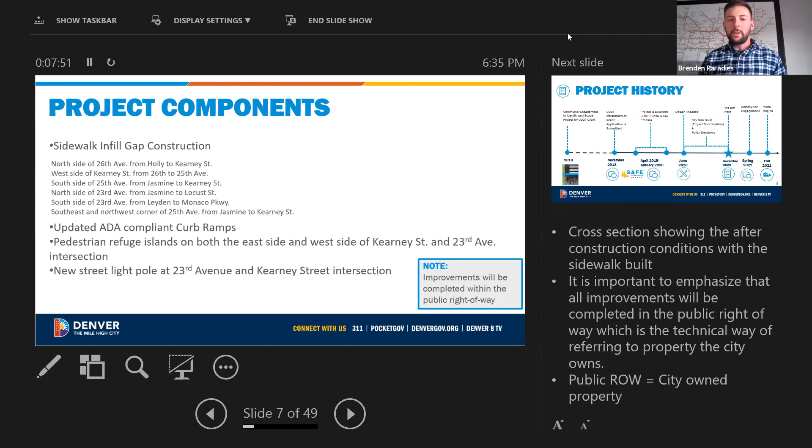The great thing about that is it's really a concrete median in the center of the street with the space in between that really helps pedestrians cross. So we're very excited to be able to include that in the project. We'll also be putting in a new streetlight pole at that same intersection to bring some visibility there. So it's really a great asset in addition to the project.

A little bit about the history of it. Back in 2017, 2018, a lot of community engagement took place with the city. I know a lot of different residents here were very engaged with that to really help identify the scope of this project in order to apply for a Colorado Department of Transportation grant. So this entire project is funded by the Colorado Department of Transportation, so we're pretty strict on the scope of what we can do with this project, and that's what we're going to be able to do.

We submitted the grant application November of 2018. We were lucky, we were awarded that in April of 2019. And throughout the rest of 2019, we really worked with CDOT on the IGA process to secure those funds so we could start doing the design with our consultant in June of last year. A lot of different coordination took place. We were able to keep going forward with Xcel and different utility companies to keep the design moving forward, and got to the point now where we can really talk about the project in confidence about what we're going to be able to build and what it will look like.

The projected timeline for when we are anticipating construction starting for this project will be later this year. We're shooting for October, but we still have to post bid for the construction of the project. We're not quite there yet, but we are getting close. So we're spending a lot of time over the summer getting those ducks in a row with our construction contractors so we can get underway later this year.

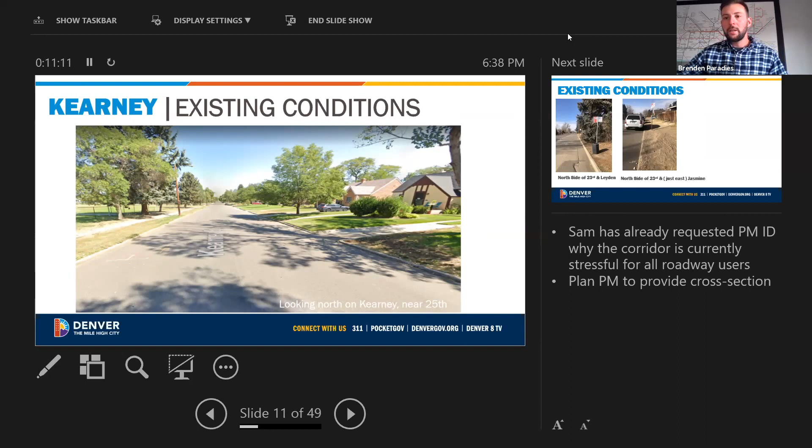And I'm sure, as you all are very familiar since you live in this area, this is just showing a picture of Kearney Street, one area where we will be installing sidewalks right up next to the property of the school. This is in between 25th and 26th. So we'll be putting in sidewalk there on the west side, which I'm sure a lot of you are familiar with, already has more or less kind of that goat path where people have been walking anyway. So it'll be really nice to get a sidewalk in there and really make that a permanent space.

Similarly, we're here on 23rd, where we'll also be putting sidewalks. So it's a really nice facility that we'll be able to do here on 23rd to get folks all the way down to Monaco Parkway without having to walk in the street. So very excited to be able to do that.

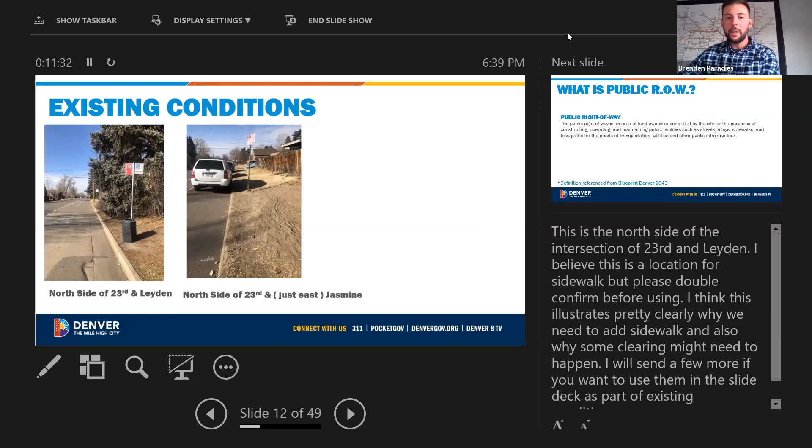And again, too, just another defining moment about what is right of way. Everything that we're going to be building as part of this project is what is called the public right of way. Basically, just a fancy way of saying a dedicated easement of which the city owns. So we just wanted to throw that in here. All of what we're building is not on private property. While it might be adjacent to private property, it's all in public right of way.

So just wanted to throw that definition up here and be clear about that as we continue forward. This image here, we pulled one—this is more or less up in the Highlands area, Tennyson, but gives you a good overview. You can see the areas in orange, which is consistent with what right of way is, or where it is adjacent to where property lines would be for private residents.

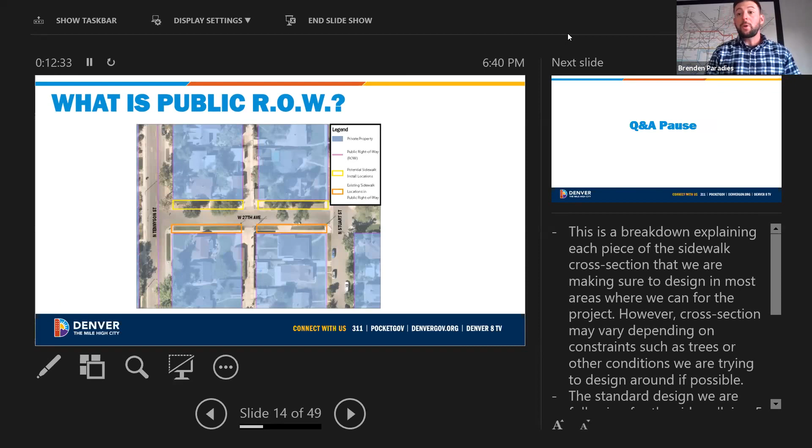So just wanted to throw that out there before we really dive into the details of the design for the project. But I wanted to have our first Q&A break, and I apologize—somehow with my presentation view, I can't see the chat box. So hopefully someone can raise those questions to our team and we can answer them. Ken, if you're able to help with that would be great, or Nora, that would be appreciated.

There's one question in the chat from John: Was signalization or a four-way stop considered at Kearney and 23rd? It's a very busy intersection. The proposed changes at the intersection seem insufficient. So the question is around increased signalization or consideration of a four-way stop, such as the ones on 26th.

Yeah, Michael, do you want to take that? I know that was something we did look into—it's something we discussed pretty early on with the city team. At the time, taking the characteristics of the neighborhood, the thought of signalizing that, and the spacing relative to Holly as well as Monaco, it was dismissed pretty early. So what you see is just a two-way stop, and again, that was really to try to keep momentum going along 23rd. So it was discussed, but it was dismissed.

As part of when the ped refuge islands are there, there'll be a lot of pedestrian yield signs. We'll also have those white hash marks or crosswalk markings there too, to really indicate, hey, there's a crossing here. So we're hoping that will help bring visibility there too.

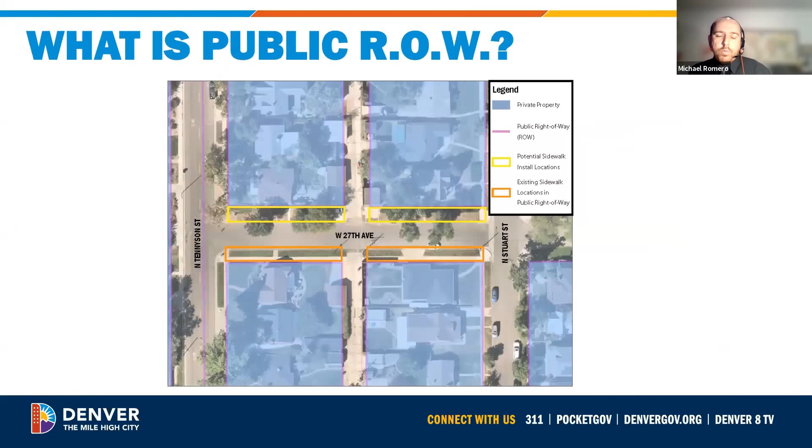That block specifically on the south side, between Krameria and Leyden along 23rd, is the last block that's part of the CDOT funded portion of this project. An application gets processed through the Safe Routes to School program, and we can't really deviate much from what blocks were and were not applied for at that time. So I think that's possibly why it was missed at the time of the application.

Got it. Any other questions before we move on? Nothing else in the chat box, Brendan. Okay, awesome, we'll keep going.

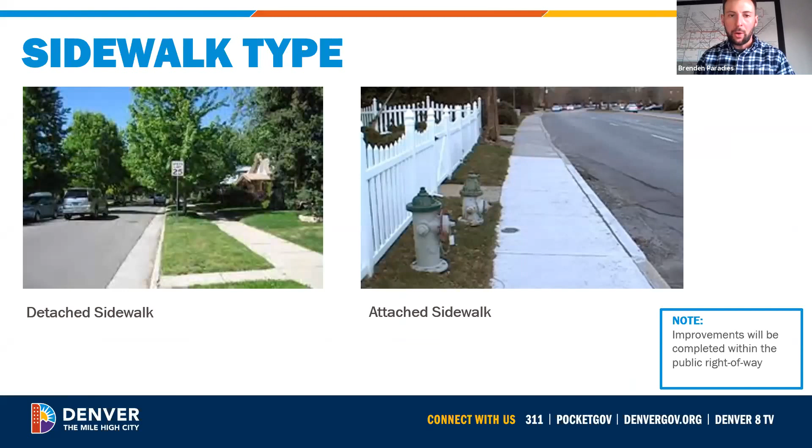This section here, we're really going to get into the weeds talking about block by block, and I was going to let Michael talk through that. But of course, we're all here to keep answering questions as we go. We'll have another Q&A pause after this next section too. So Michael, I'll let you start here.

Sure, no problem. Again, my name is Michael Romero. I work for Stanley Consultants, we are the consultant team. I'm the project manager for the consultant team, helping out the city with this project. We did a lot of the work pulling these plans together, so hopefully I'm able to answer any questions that come up.

I wanted to start out with some general terms. The first thing you guys will see out there in terms of construction are aggregate bags. They're kind of like rock gravel bags that are placed in the curb and gutter. This helps keep down any erosion or anything like that kicked up during construction from getting into the sewer system. It's just a way of keeping the construction area clean. So once you see those go out, you know construction is going to be starting soon after that.

Something else you'll see is that on both sides of the sidewalk, generally we have to grade back into the ground to make things smooth, so the sidewalk's not floating in the air or dug down into the ground. That way it's all one smooth transition. So in the areas along the sidewalks, you'll see there's going to be some disturbed area, and that's going to get sodded over at the completion of construction.

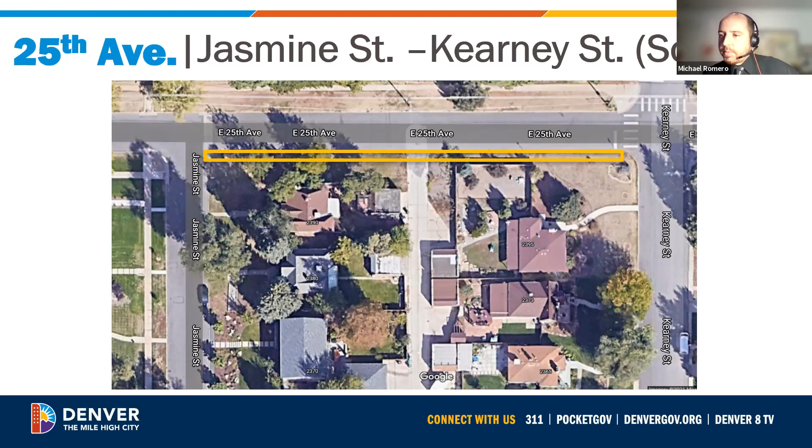This one's going to be a little bit more interesting. The property that's on the east of those 2 is a detached sidewalk, about 5 feet, I think 5.5 feet. We're going to redo some of the alley pan in between the 2. Then on the west side, west of that alley, we actually push the sidewalk out even further.

We do this for a couple reasons. One, it aligns with the sidewalk west of Jasmine. Two, we're really trying to salvage those 2 trees. They're in great condition, so we'd love to keep them. In doing so, there's a little bit of a grade difference here.

On the sidewalk, for a large portion of this half block, you're going to see like a 6-inch curb head. We're trying to avoid walls, so if we put in this 6-inch curb head, we can keep everything looking good, not intruding into anyone's property. This will entirely be within the Denver right of way. So that's really the only thing unique about that block.

Now we jump down to 23rd. We're starting at Jasmine, heading east to Kearney. This is going to be a detached sidewalk as well. We're only doing work on the north side here.

Again, there's going to be another little curb head on the back of the sidewalk, specifically for the property on the west. We are going to clean up that alley pan, and I think there's going to be a little bit of driveway work too that just makes sure everything ties in really nice.

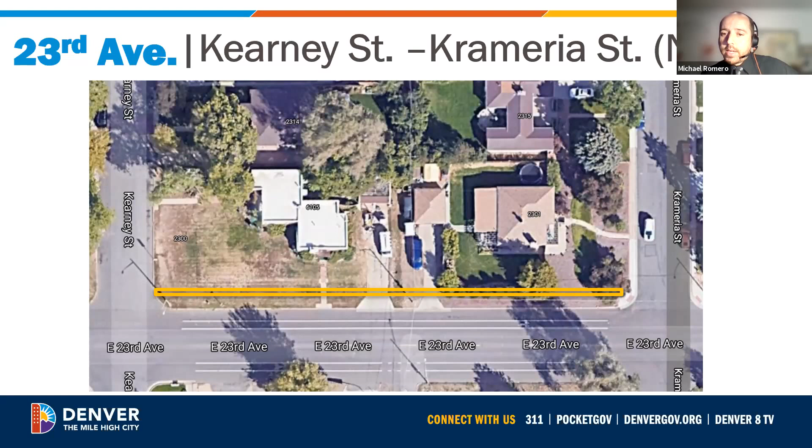If you can go back one more - you can see here too where it goes from detached to attached sidewalk, kind of mid-block there. And again, the decision was made to do it there to really keep intact as much as we can. And again, it's going to continually be attached from here to the east. So it just seemed like an appropriate place to make that decision.

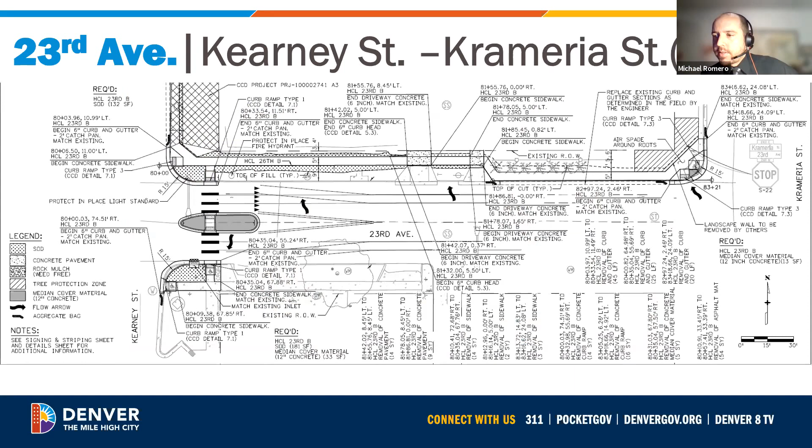23rd between Krameria and Leyden. This is the last block of the CDOT funded portion of the project. Here, we're going to have an attached sidewalk for the whole block. All the trees are going to be saved. There will be some pruning by Denver Forestry. And I think that's it for that block.

And then we move on to 23rd, east of Leyden to Locust. It's going to be attached on the north side. The south side is going to be detached - it's just kind of the characteristics that we're still playing out on the south side. On the north side, we're going to clean up the driveways just to make sure everything ties in nicely with the sidewalk.

The property on the northwest, the one that faces Leyden here, there was quite a bit of landscaping that even with an attached sidewalk, we're going to ultimately get into. So there are going to be some tree removals at this property. But the property to the northeast, we were able to avoid the trees.

And then the west side of Locust - I think the curb ramp that was recently placed met the ADA standards, so we were able to salvage those ramps and tie into that existing.

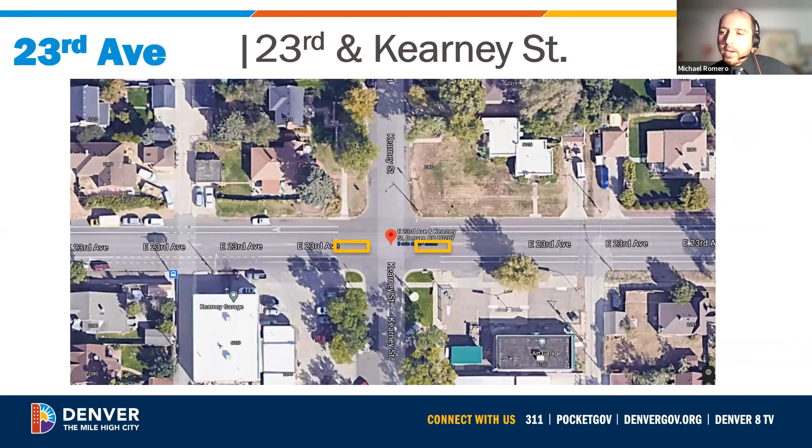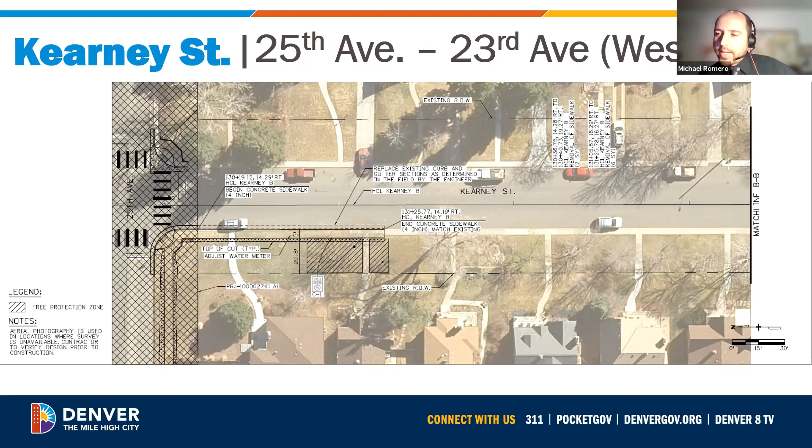So this is what I was getting at. The final portion was on Kearney between 25th and 23rd. North is to the left here, so you can see 25th on the left side. We are finishing a last little stretch of sidewalk on the northwest side of the block, of Kearney between 23rd and 25th.

And then the last chunk was actually the opposite corner of the block, along 23rd, on the southeast corner. Both of those are going to be attached sidewalks. They're only going for a property or two, just tying into what's ultimately an existing sidewalk.

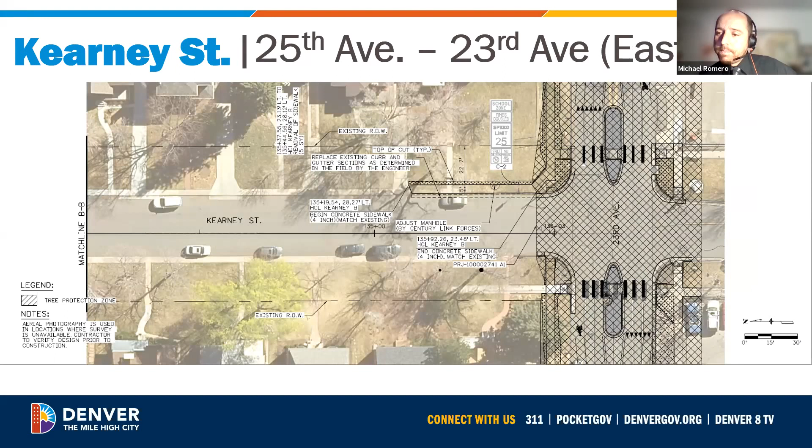So I know I threw a lot at you. I'm available for questions if there's anything specific that needs to be asked.

Hi, this is Susan Rutherford, and you mentioned the house at 23rd facing Leyden Street. Yes. And you said there would be a lot of tree removal. Can you tell me more about that? Correct. And also, it's interesting to me that none of that's been mentioned if I hadn't joined this call.

So... wow, thanks for dropping a bomb. Can you tell me, because I've put a lot of money and time over the years investing in beautifying the street, so it's shocking and saddening to hear that my trees are going to be taken out. So tell me about that, please.

Sure. So in that portion of the block, ADA requires a 5-foot sidewalk. So pretty much from the back of curb, we're going 5 feet out, plus there might be a foot or so to tie back into grade. But the hardscape, really anything within that first 5 feet, is going to be removed in order to get the sidewalk through there.

There are a number of trees, I think about a dozen, that are within that 5-foot range. As far as getting trees replaced, I think there is a program to work with the city, but from a technical perspective, that's what I can tell you.

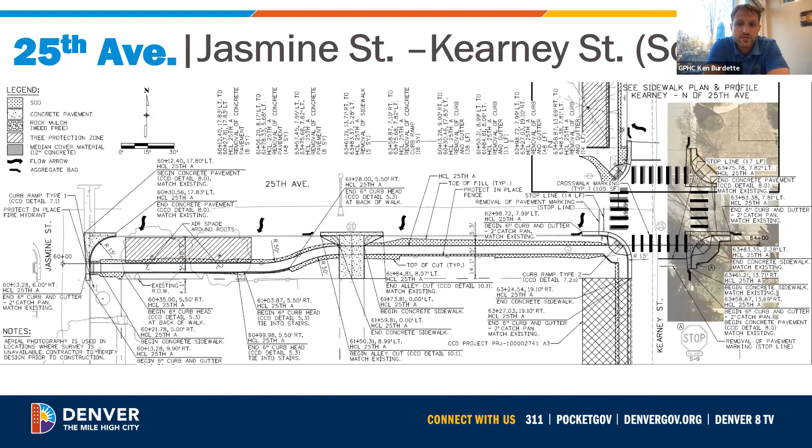And then in regards to one question from Gary: will the new sidewalk ramp configuration at 26th and Kearney be identical to what is at 26th and Jasmine? So comparing the sidewalk ramp configuration at 26th and Kearney to 26th and Jasmine.

I am pulling up my plan sheets now, just one second - I have them open, just looking for that intersection. So at 26th and Jasmine, on the west side of that street, the existing curb ramps that are there will remain. On the east side, they're going to be a little different - it's actually just going to be one ramp in the east-west direction, since there's no need to have one south-oriented.

Kearney, it's proposed differently than the west side of Jasmine. Generally they're directional, similar to Jasmine, but they'll have wings, at least in the east-west direction. Southbound will be directional as well, so they're all directional. Some will have wings, some will not. It's really case-by-case for each corner. We try to apply a standard, then there are slight modifications to each.

I hope that answers your question.

Question from Allison: can you comment on the total width from curb to the end of the amenity zone on detached sidewalks? Along 26, the amenity zone is generally about 9 feet of grass or whatever's there today between the back of curb and the sidewalk. In some areas it reduces to about 5.5 feet, which I think is the case along the west side of Kearney between 25th and 26th. Along 23rd, it's generally about 5.5 feet, or in some cases 9 feet - actually it looks like mostly 9 feet along 23rd. So it depends on the block. I can look up specifics if there's a specific question, but that's generally where we're at.

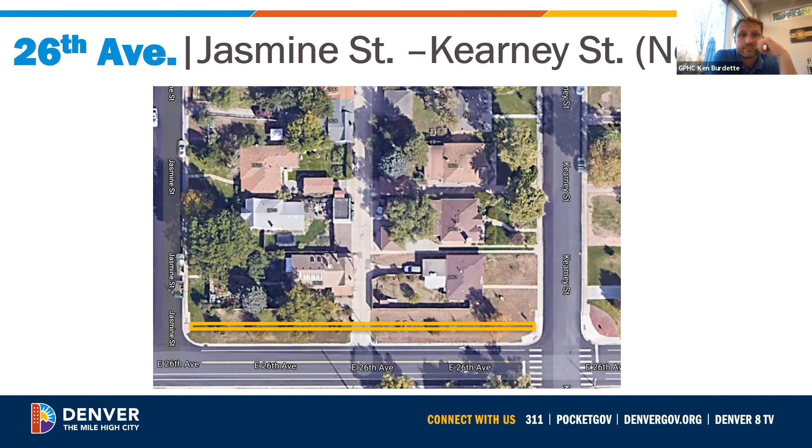One more question, from Sean: will there be irrigation sleeves put in under the sidewalks for eventual tree planting? When we do survey, we don't know who does and doesn't have irrigation, so when we come across it, it's really just a replacement of what's out there today. If there aren't sleeves there now, since there's no sidewalk, none will be installed as part of this project.

I think that's it for the questions right now that have come in. If anyone else cares to unmute, or if not, I'd say we continue with the presentation.

Yep, so we'll just dive in now. Excuse me, I'm sorry, Ken - this is Adam Burstein. Hey Adam. Yeah, hi there, I could get on video here.

Sorry, all very informative, I don't mean to be just about my block, but I'm curious - can we get a design for our actual block to know what the specifications are? I know there's maybe some variance between each block, some are detached, some are attached. It'd be helpful to know, is there a way to look it up? Sure, I can send you the civil drawing for your block if you reach out to me with your address, and I'll send you the specific section for what it'll look like by your residence. Perfect, thank you, appreciate it.

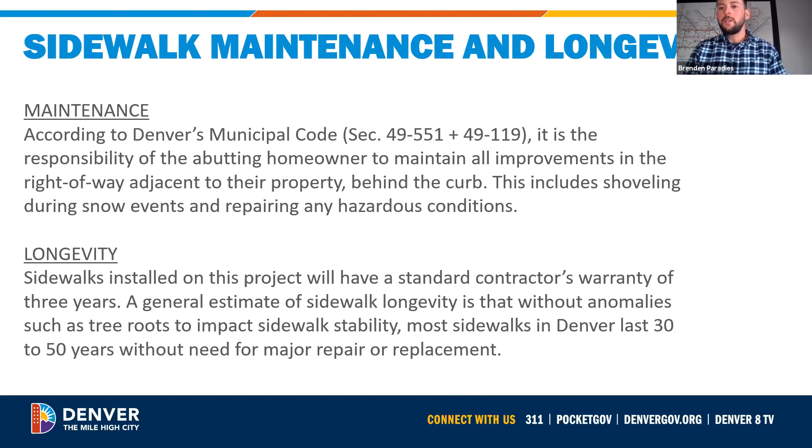Also wanted to put this up here, of course, for municipal code, as we're all used to - shoveling our sidewalks and maintaining and taking care of them once they are here.

So our next steps - we're finalizing the design, hoping to go out to bid soon to get our construction contractor solidified. That might take most of the summer, but we will send out a notification letter 90 days prior to construction, and also a notification door hanger 48 hours prior to construction. I can be in contact with Ken once we get our construction date to make sure that gets sent out to folks as well. We're anticipating construction to start later this year - we're shooting for October. But those are the immediate next steps for notification.